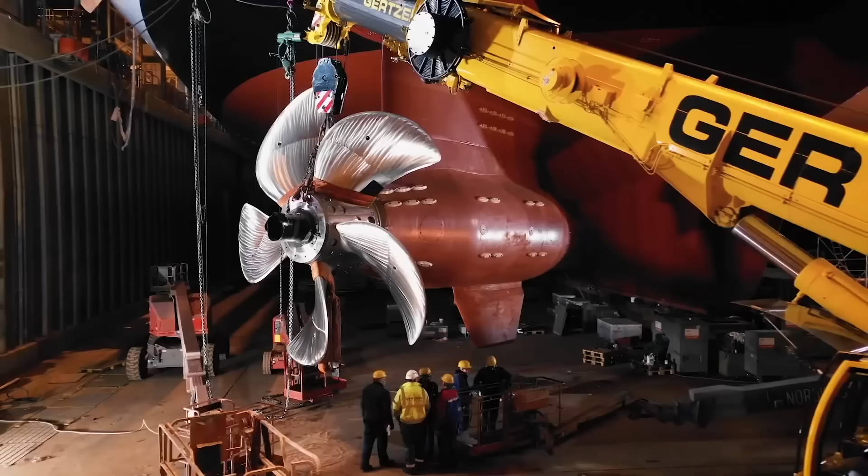By the way, the ship doesn't have 2 of these propellers, but 3. They're mounted on podded propulsion systems, so-called azipods. Those are made up of huge pods which are suspended from the bottom of the ship at the stern. They are capable of rotating 360 degrees, meaning azipods provide the giant vessel with easy and quick maneuverability.

I will show you in more detail how all this works in the second part of the episode, but for now, I will only say that these azipods were manufactured in Finland, and then sent by sea to the French town of Saint-Nazaire, the home of the shipyard where the vessel was built.

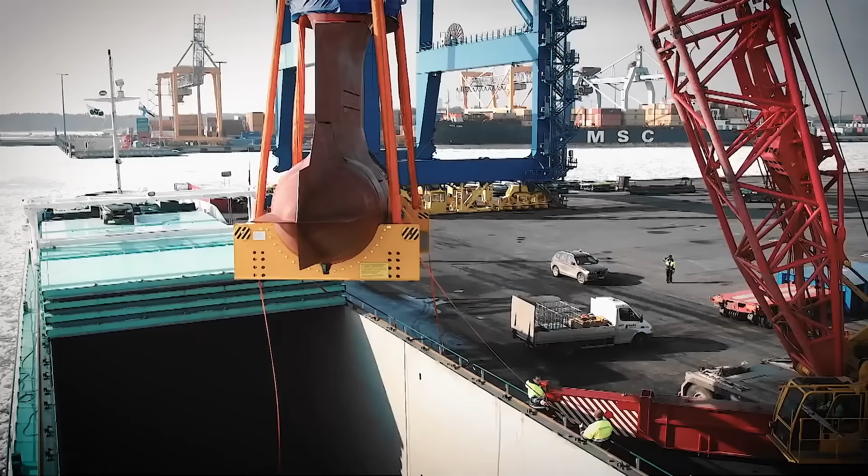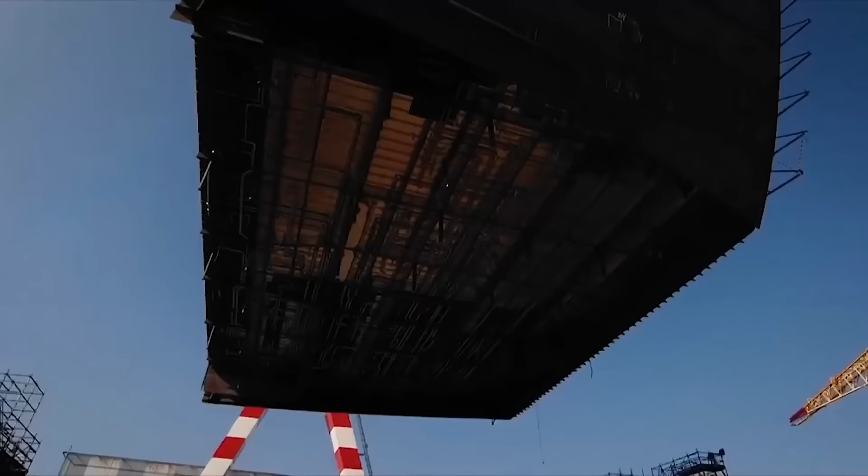In general, Symphony of the Seas is a huge construction set consisting of hundreds of thousands of parts which were manufactured in dozens of different countries located on different continents. So it began to unite people from distant corners of the world even before the first passengers of various nationalities ever stepped on board.

Boarding a ship is very much like boarding an airplane. Even these gangways, those who often fly know that they are almost identical to those in airports. Well, maybe these are a little wider. Planes have a maximum of 2 such gangways, while the largest airliners might have 3, but here there are 5. And another interesting peculiarity, boarding of an aircraft starts about an hour before departure and stops 20 minutes beforehand. But since 6,000 people have to go through here onto the ship, boarding begins 6 hours before departure.

This is why cruise ships almost always depart in the evening. All day long, passengers come on board, get used to their cabins, and then closer to sunset, the gangway is finally pulled back, the doors are all closed, and the ship rolls away from the quay wall.

Thanks to those azipods that we mentioned earlier, and additional bow thrusters, Symphony of the Seas completes this difficult maneuver by itself, without the help of any tugboats. Only a small Coast Guard patrol boat moves ahead of it, dispersing small pleasure boats and ferries out of the liner's path. This moment, already routine for the crew, is always quite exciting for the passengers, who at the moment of departure always pour out onto the upper decks. After all, the sea, and even more so these calm oceanic waters, aren't anything like railroad tracks, and these gigantic ships are actually seen off in a very different way from trains.

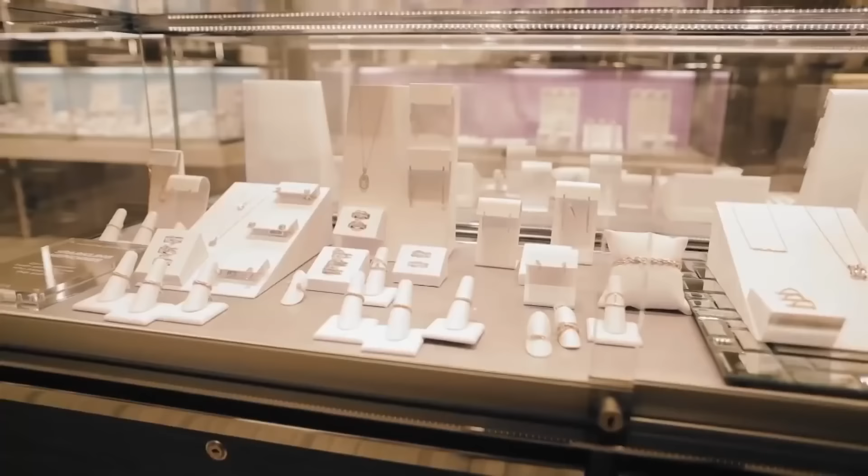The liner is 1,188 feet long, more than 3 soccer fields. Its width is 216 feet, and in this huge space there are 28 restaurants, 3 swimming pools, 10 jacuzzis, a theater equipped with the most complex Broadway machinery, an ice rink, a tropical park, a water park, a fitness center, a casino, and many shops and boutiques that constantly keep tourists in a state of shock and awe and continuous happiness. It is somewhat reminiscent of something out of a fairy tale, a place where you need only eat, sleep, and drink.

When you look at the map of the ship, these are posted everywhere here, you get the feeling that the ship is some kind of toy. Yes, there's 12 passenger decks. Yes, it says 2,750 cabins, but what do all these numbers mean? You only start to get a sense of it right here in the elevator atrium. Just take a look. 6 high-speed elevators transport thousands of people to a height of 229 feet around the clock.

And at the same time, all this is now moving at a speed of 30 miles per hour in the direction of Mexico. Incredible. Even more incredible is the fact that the ship is directly controlled by only 3 people while it's in motion. And among them, there is no boatswain, no skipper, no helmsman. Even the captain himself isn't on the bridge all that often.

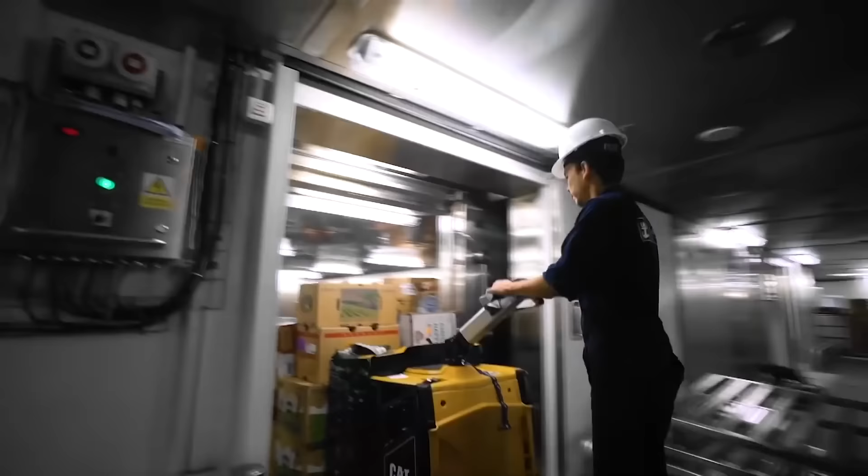While tourists are exploring local attractions, on the lower decks, preparations for the main task of the day are underway: cooking dinner for 6,000 passengers before they get back on board. For this, you first need to bring up several tons of products from the storage area to the galley.

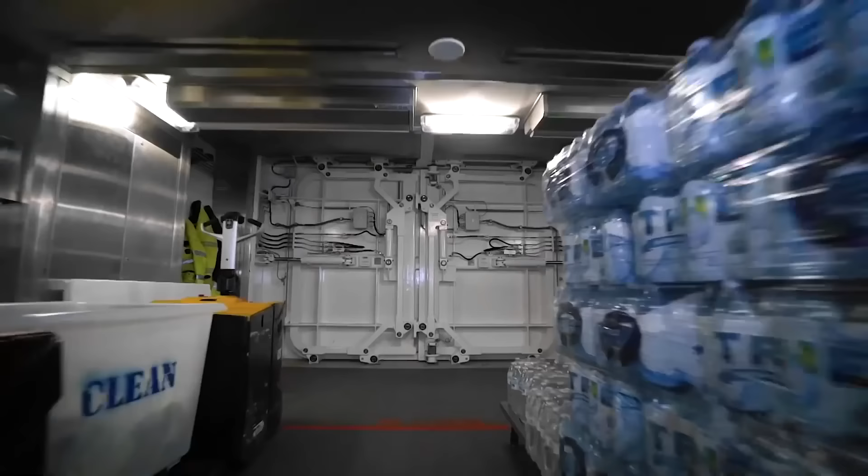Usually, the entire selection of products for the cruise is loaded onto the ship at the port of departure. The liner can only take water on at interim stops, and even then only bottled water. They are very afraid of the possibility of food poisoning here. Since thousands of people live compactly on the ship, a simple case of E. coli can turn into a real epidemic in the span of just a few hours. And even putting that aside, not all countries can provide products of the high quality that Symphony chefs require.

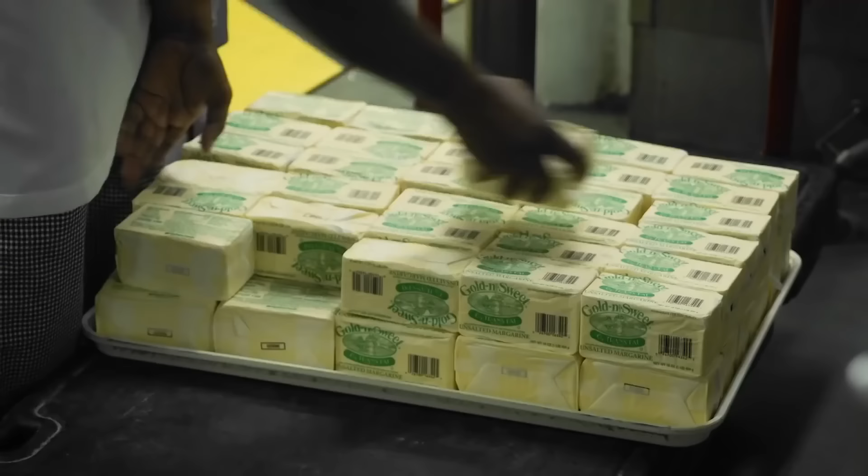All the refrigerators and storage boxes here open automatically with the press of a button, but there is one door whose button is behind a lock. Thankfully, I have the magic key. You've probably already guessed what's behind this door. Here it is, the holiest of holies of Symphony of the Seas storage area: several thousand bottles of elite red wine.

Milk, meat, seafood, vegetables, frozen products, fish, all of that and more is stored in the dozens of other refrigerators. Anything and everything that might be needed to prepare the 350 different dishes found on the ship's restaurant menus. Of all the foodstuffs stored on the ship, only 2 products are honored with having their own private refrigerators, simply because they are the most consumed items.

First, we've got bananas. Here are plenty of boxes with yellow ones, and there are also boxes with green ones. They will finish ripening during the cruise. And the second product is the most popular. What do you think it is? I'll show you now: eggs. 120,000 eggs are eaten on board every week.

Moreover, bananas and eggs are, as economists and logisticians say, goods of inelastic demand. Their consumption rate, and hence the required amount, is easy to predict. Things are more interesting when it comes to the rest of the products on board.

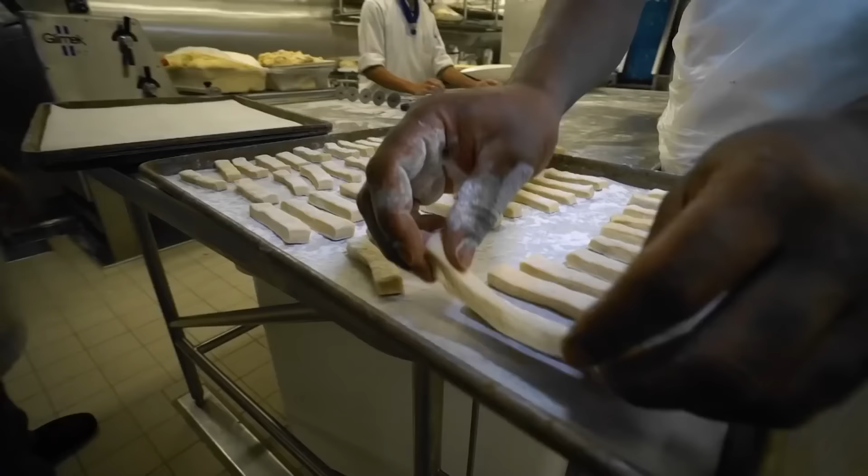On just 3 decks, more than 1,000 people are employed in this huge floating kitchen, 250 of whom are professional restaurant chefs. They fry, boil, flambe, sauté, and whip around the clock and in shifts.

Take breakfast rolls, for example. 12,000 of them are baked here every day.

In fact, the responsibility of the cooks here is enormous. The clients on the ship are very demanding, the products are expensive, and the cooking portions are gargantuan. Therefore, the slightest mistake in the proportions of ingredients can cost tens of thousands of dollars.

Well, for example, tomato soup, 160 liters of it. If it's a little bit overcooked or undersalted, that's it. Eat it yourself since no one else will.

Seating and serving several thousand people in the liner's restaurants at the same time is a separate logistical task, and they strive to make it so that customers don't have to wait more than 15 minutes for an order. Several hundred waiters of 50 nationalities cope with this task, each of whom must speak at least 3 languages.

And bartenders should know at least 5. Well, technically there was an exception made to that rule.

In general, everything on this ship suggests that this is a high-tech structure created according to the latest leaps of science. For example, in this bar, drinks are mixed, probably in the most progressive way on the planet. All you have to do is make your choice on the tablet screen.

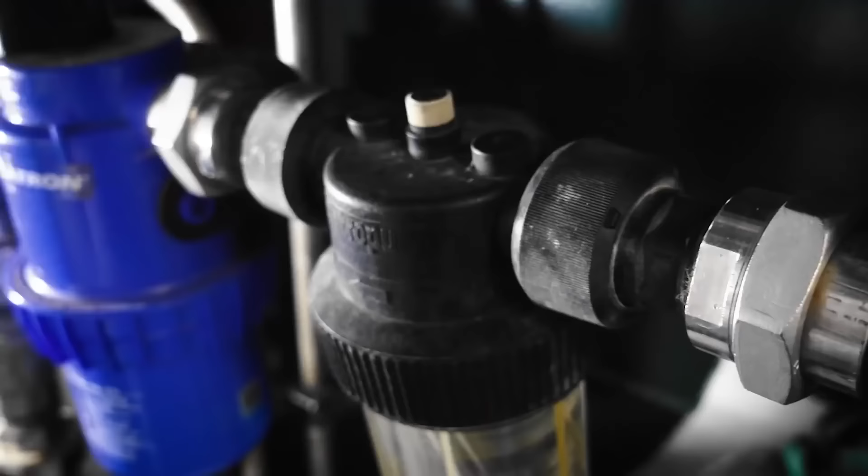Here's the main secret. Here in this blue barrel, fertilizer is kept. Water passes through it, carries away some of the fertilizer, and carries it to the plants.

So thanks, in fact, to this seemingly unremarkable little device, this whole huge blooming park exists.

Another secret of the permanently green park is its honeycomb structure. There was no solid ground here. All the plants, from the trees to the grass, are inserted into special cells in separate segments, small plastic boxes.

It turns out to be something like a huge puzzle. If one of the segments suddenly starts to get sick or dry out, it's simply changed out for a new one upon arrival at the home port.

This wall of vertical landscaping in the ship's central park follows the same principle. The gardener, who turns out to be a bit of an industrial climber as well, simply climbs in the bucket and changes out the parts of the wall that he doesn't like and discards the old segments.

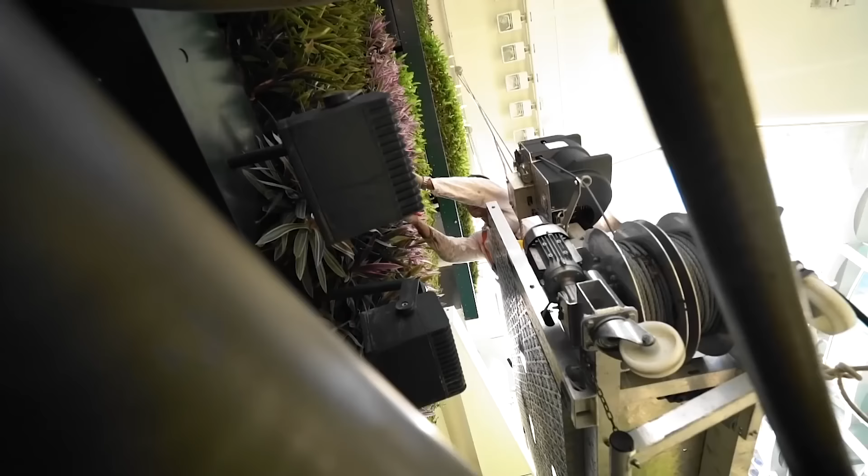There is no time for sentimentality. Nothing should prevent people from enjoying their time here and being filled with joy. Remember what I said at the beginning, that this episode was about a cruise ship without romance and without leaving anything out?

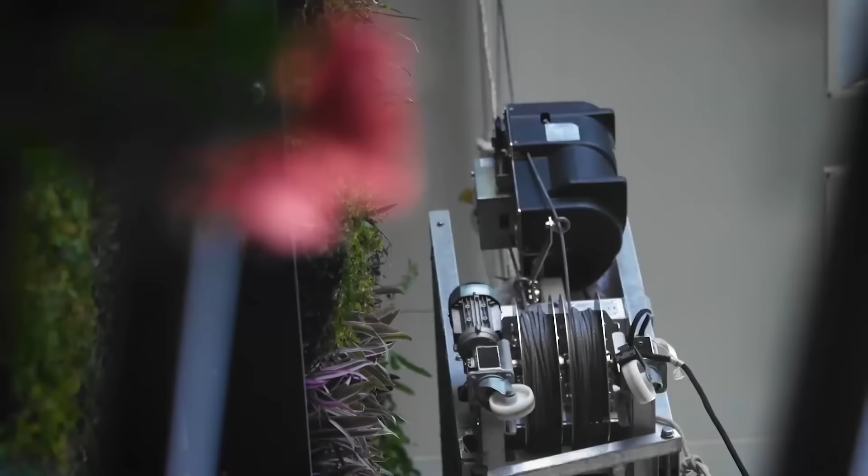In the next episode of Monster Machines: why doesn't the ice on the only floating ice rink in the Caribbean melt? Well, it tastes like the most simple, ordinary Russian snow.

How can 1,500 sheets be washed and ironed in one day? I want one of these for my house. Only thing is, I'm afraid it won't fit in my laundry room.

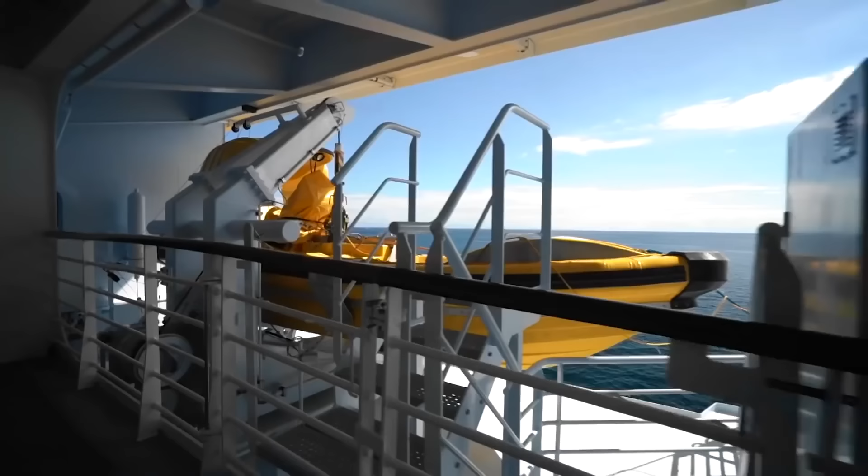Does Symphony of the Seas have enough lifeboats in the event of a disaster? How are the engines of this liner, which consume 3 tons of fuel per hour, arranged, and how do they work? 5th grade physics at work on the largest ship in the world.

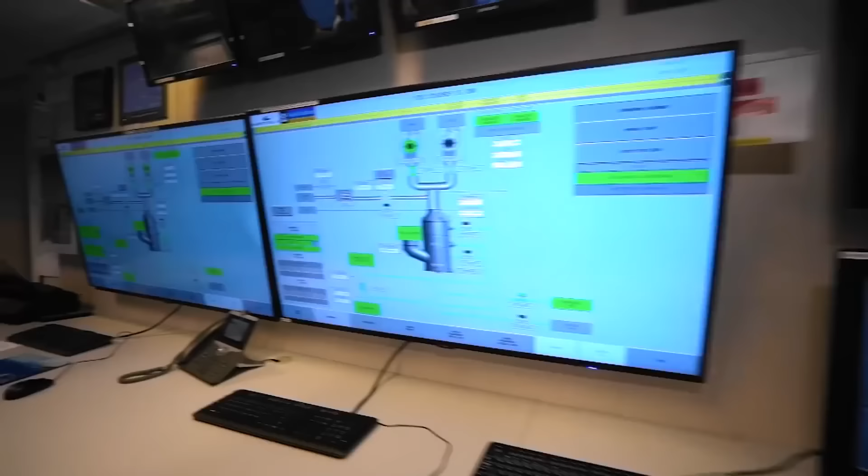What is a 19th century telephone doing on a super modern ship? Hello? Bridge? And how can 30,000 plates get washed in 2 hours? Mr. Clean would be impressed.

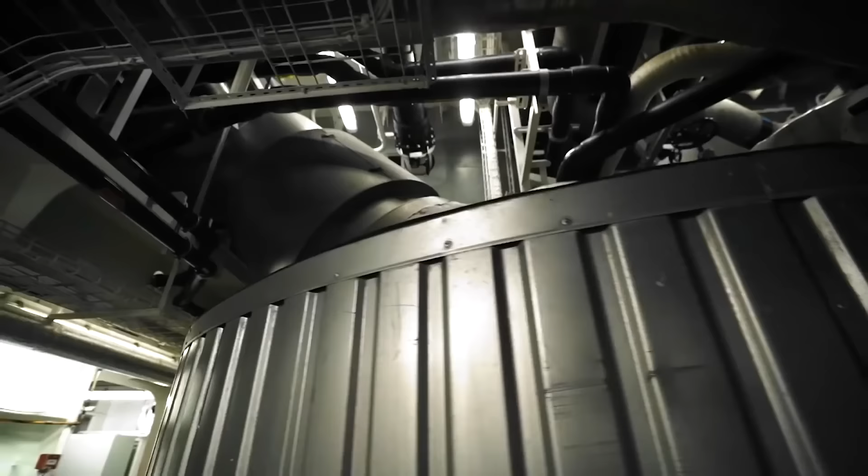See all this and much more from the anatomy of the world's largest cruise ship in the next episode.

In the first part of our look at the anatomy of the largest passenger liner in the world, we told you about and showed you why Miami is the home of this monster. Essentially, it turns out that the ship wasn't built to fit the size of the port, but the port was built to fit the size of the ship.

Who are the people who run this giant, and why is there no helmsman on the ship? This is the captain's chair. There's no steering wheel. What room on the ship is the most secure and guarded?

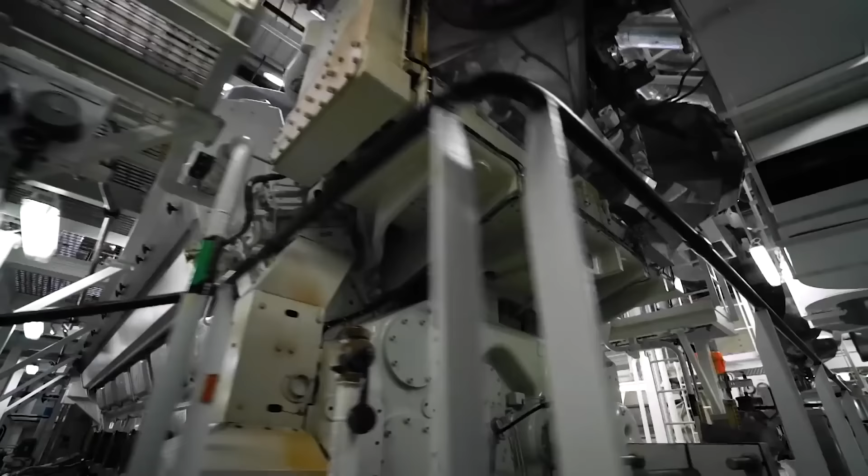Here it is, the holiest of holies of Symphony of the Seas storage areas. And how many cocktail recipes does the least talkative bartender on the largest ship in the world know? You're not much of a conversationalist.

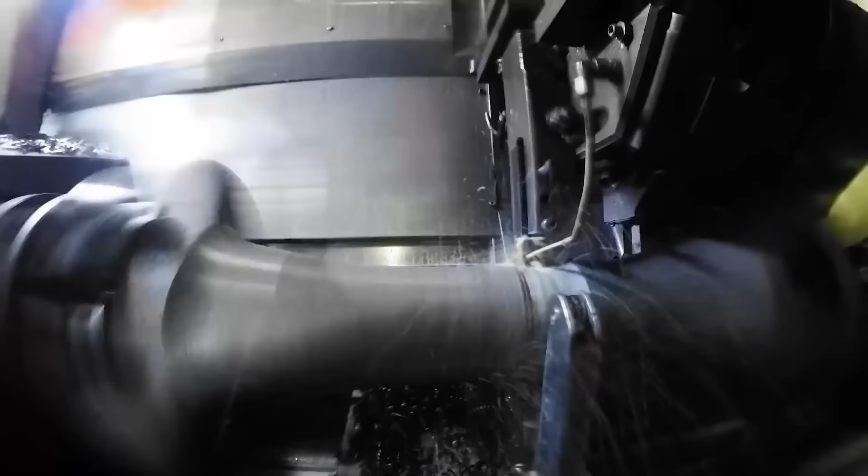All this was in the previous episode, and now we have even more about what's hidden inside this monster, a cruise ship without romance, but with science.

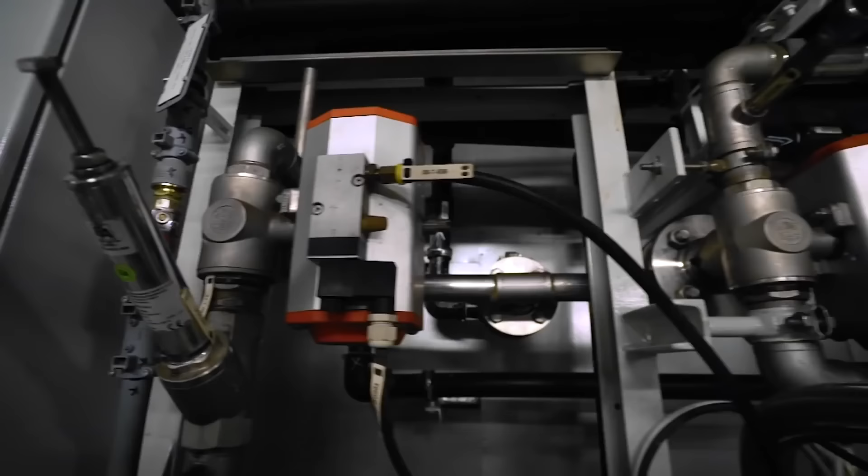And what could be less romantic on a ship than the machinery room? In the lower part of the ship, where tourists aren't allowed, day and night there's the roar of machines working in the semi-darkness, and these are what makes this entire giant city on water move.

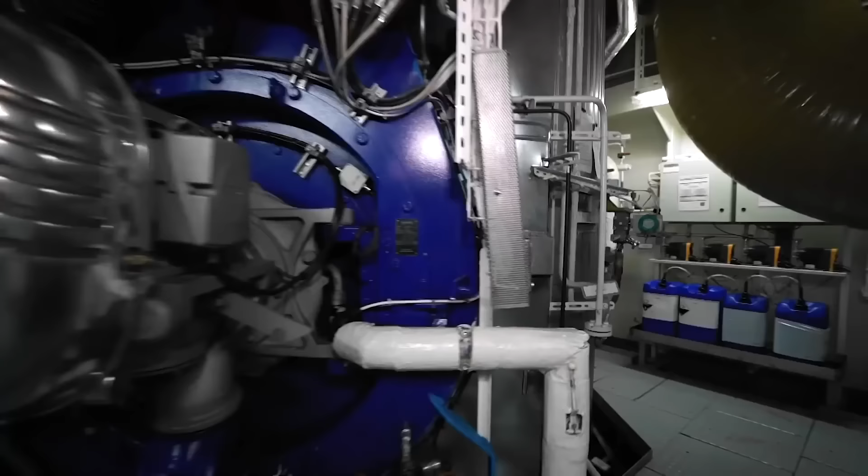Symphony of the Seas has 6 diesel engines with a total power capacity of more than 100,000 horsepower. For a point of reference, that's approximately the power capacity of 1,200 cars.

However, not even close to all of this energy is spent directly on moving the vessel. The ship consumes colossal amounts of electricity. For example, for lighting, there are about 140,000 light bulbs on the liner.

Also, electricity is spent on the operation of air conditioning systems and on the production of large quantities of water vapor. Despite the fact that steamers and steam engines are a thing of the past, modern liners still use steam. A lot of steam.

No, it of course no longer rotates turbines as it did, for example, on the Titanic, but steam is needed for more domestic purposes. It's a simple method for heating the water in showers and bathrooms, and it also heats different spaces when necessary.

However, those aren't its main functions. Steam is necessary for the heating systems for the huge fuel and oil tanks, and it's also used in fuel-oil separators. It's consumed by the turbo drives of some pumps, and for several other important machines on ships, even in the 21st century.

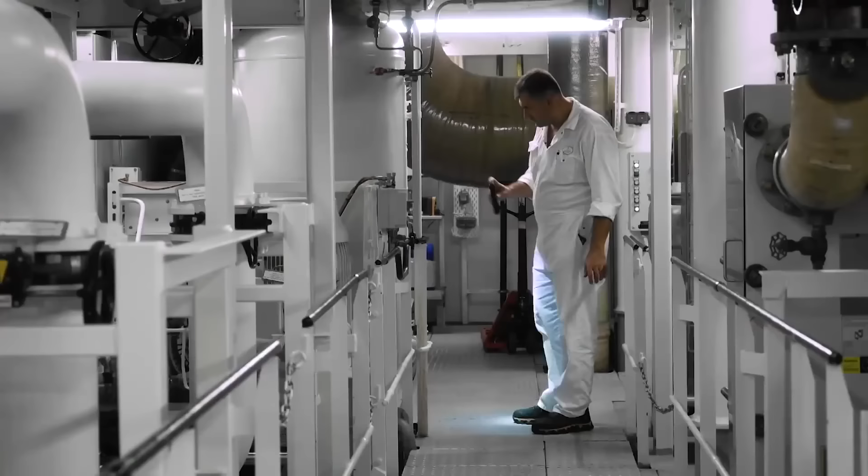Moreover, it must be perfectly clean so that impurities don't build up on the walls of the steam lines. Therefore, it is created from distilled water.

But where do they get such large amounts of distilled water? It's produced right here on the ship using giant distillers. Here they are. There are 3 of them.

The principle of operation is very simple. It's basically a big tea kettle. This is where water from outside comes in. Here it's boiled, steam accumulates in the upper part of this chamber, and the sea salt settles down at the bottom.

So after a while, overheated steam, and there's a lot of it, enters this chamber. Here it condenses, and as a result, the finished distilled water is drained through the pipe.

And the leftover salt? No, it's not used in the kitchen. They just throw it back into the sea. Several tons every day.

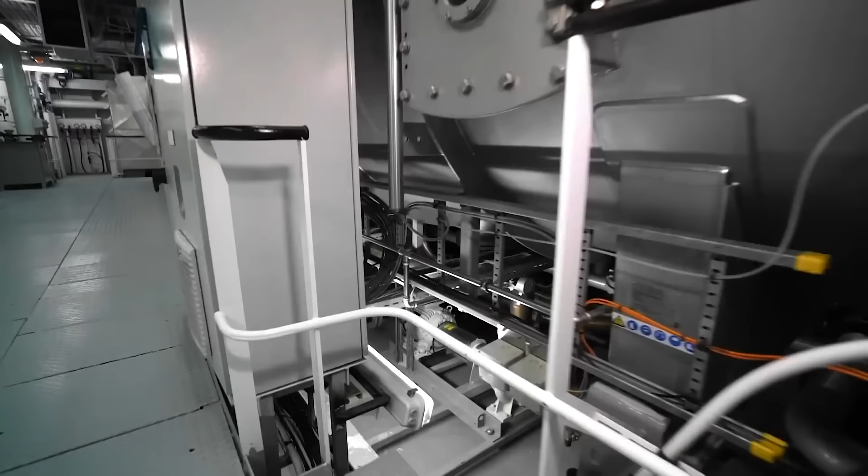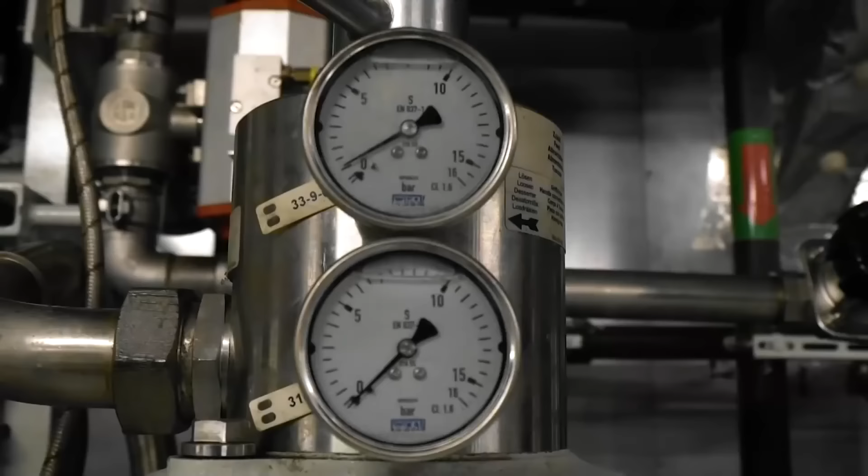This does not harm the environment in the slightest, since in essence they're only turning the ocean's own salt back to itself, while keeping the moisture on board. Then the distilled water goes on to be filtered, and then it enters the boiler.

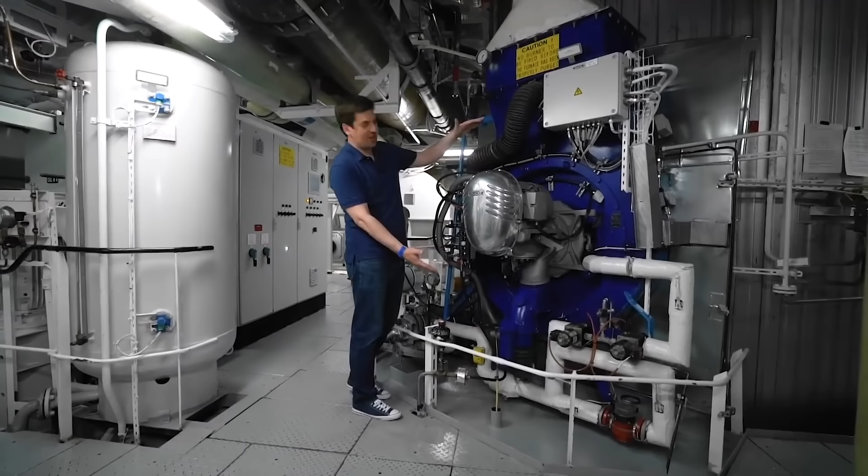The principle of its operation is about the same as that of the boilers many of us have in our bathrooms at home. There's a small burner here at the bottom, and a tank of water on top—a very large tank, 5 tons—and it starts boiling in just a matter of minutes.

In the end, the resulting steam is used for its intended purposes. Part of it, when it condenses again, is sent back to the boiler. This is the so-called reverse cycle. But most of it is irretrievably lost, and therefore the reserves of distilled water have to be replenished all the time.

It's also needed to freeze an actual skating rink on the ship. Here you can skate during the day and watch an amazing ice show in the evening, featuring a number of Russian figure skaters.

The ice here is of a very high, one might say Olympic quality. The ice on the rink measures about 3.5 inches thick. Surely many of you have seen an ice resurfacing machine on TV, or maybe even in person. They've got the exact same kind here, though maybe a little smaller than typical ones.

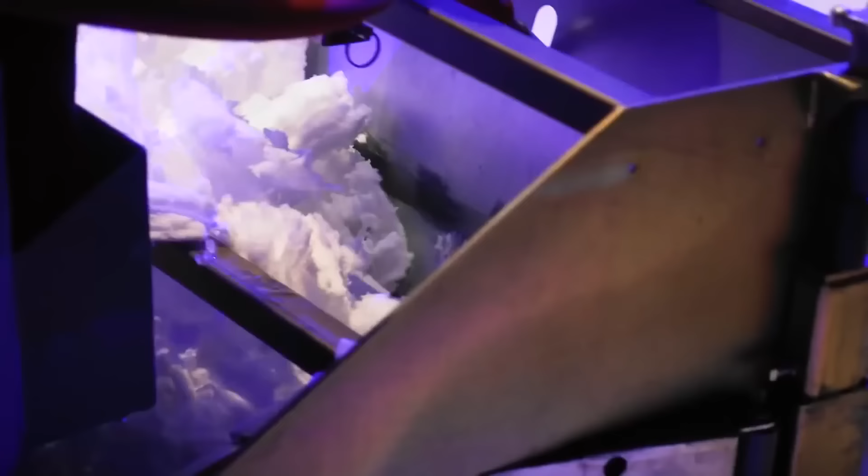Since this ice is frozen from desalinated seawater, it doesn't freeze quite as well, and according to the skaters, it's softer than the ice they are used to performing on land. It's hard for me to imagine how ice could be soft, but what is absolutely certain is it's incredibly clean, distilled. I even gave it a taste, but it was really nothing miraculous, just your typical snow.

The total weight of the ice in the arena is several tons, and a refrigeration unit is needed to freeze it. Again, it's about the same as the one used on professional skating rinks and arenas, though this one might be a little smaller. It's located, as you'd expect, in the area under the stands. The principle of its operation is very simple.

Through special pipes, wrapped in thermal insulation, water and refrigerant with a temperature of 14 degrees Fahrenheit are pumped to the arena. This freezes the ice layer by layer. It takes about 5 days to prepare the entire ice rink.

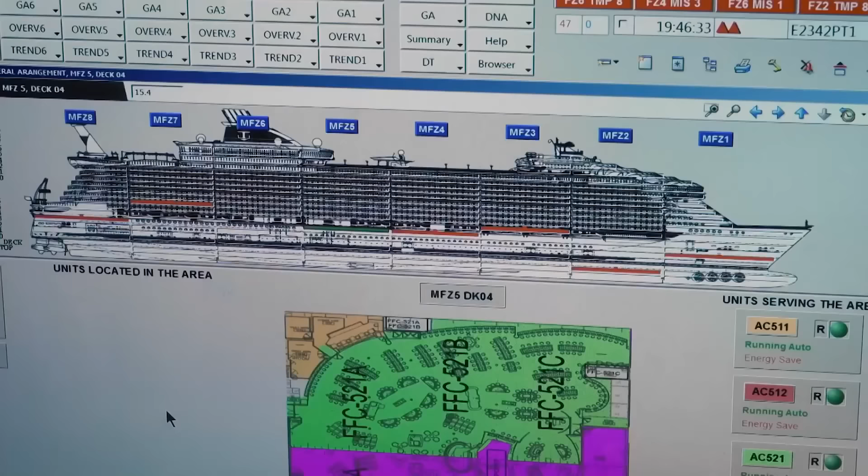The owners and designers of Symphony of the Seas claim that this ship is not only the largest in the world, but also the safest. There are so many different safeguards in place in its control system that it's argued it's almost impossible to lead the liner into disaster, even if you were to deliberately try to do so.

Still, in the event of an extreme case, there are means of evacuating the ship on board. They have to accommodate the evacuation of all passengers and crew if something were to happen. These lifeboats, to match the ship, are the largest in the world, each with a capacity of 370 people.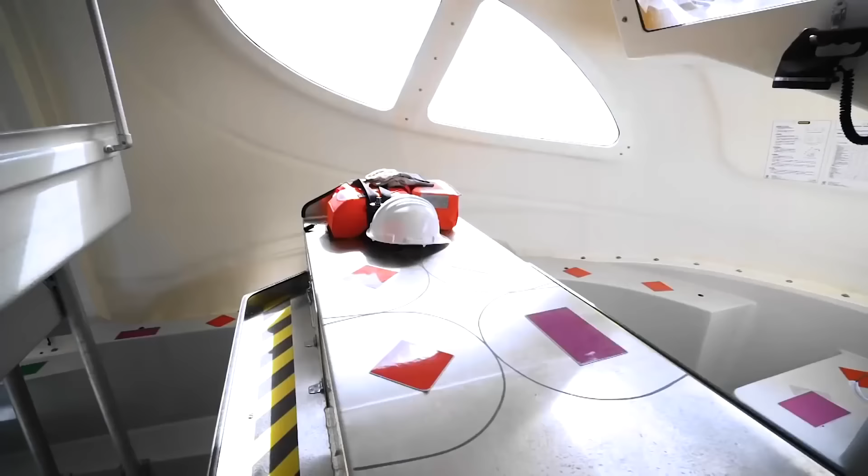There are 18 of them on the ship, and they are kept fully prepared at all times. Their fuel tanks are filled, and they have a cruising range of about 155 miles. There's a special supply of dry rations and water on board in sealed boxes, since in the event of a disaster there would be no time to bring it all from the ship.

In general, everything is thought out to the smallest detail. This unsinkable and waterproof plastic jar, for example, contains signal flares.

In addition to the huge boats, there are also many rafts that inflate themselves in the water, and several high-speed rescue boats, used to coordinate action and quickly help people who find themselves in the water.

The crew must participate in evacuation exercises at least once a month. This vessel has never seen a real red alert, but thanks to constant training, 2,000 crew members are ready for any turn of events, 24 hours a day, 7 days a week.

The ship also has its own waste recycling plant. Here it is. This, for example, is a machine for pressing cardboard packaging. Here, cans are collected, then they are all crushed into these large bricks.

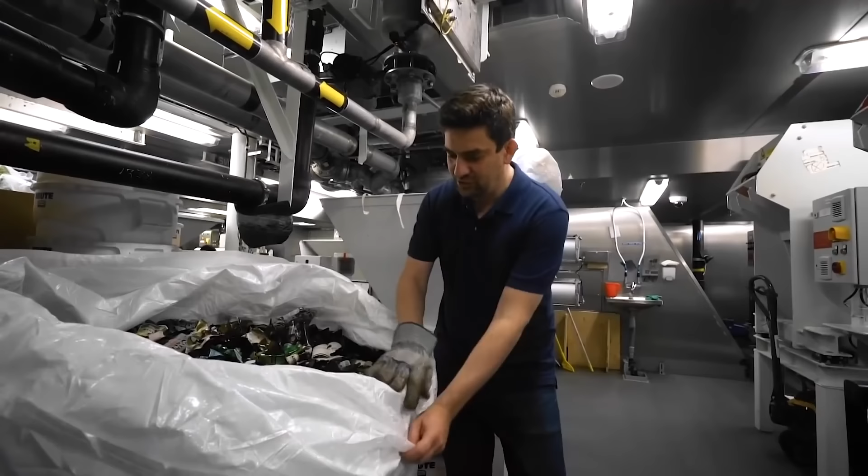Cellophane is processed here. At first glance, it's a little paradoxical how they deal with glass bottles. I'll show you now—they are simply broken into little pieces so they take up less space, and sorted as follows: here we have a big bag with dark glass, here we have broken transparent bottles, and here we have green glass.

And here's what's surprising: as is everywhere else on the ship, in this waste recycling shop, everything is kept perfectly organized. There isn't even an unpleasant smell here.

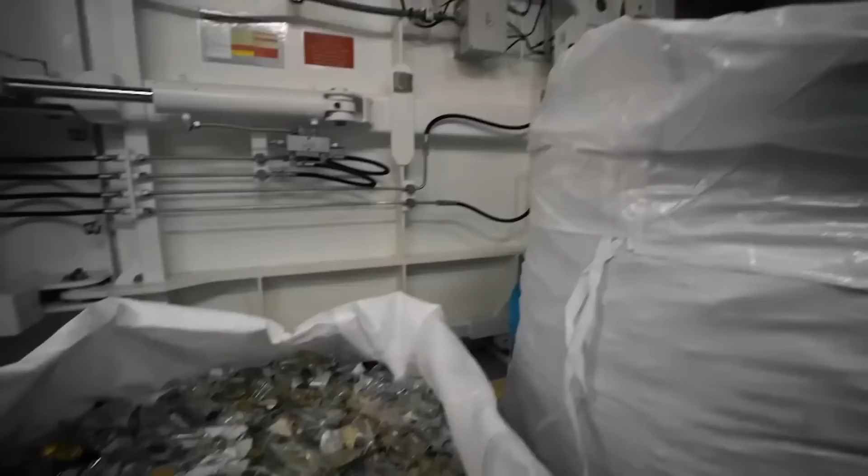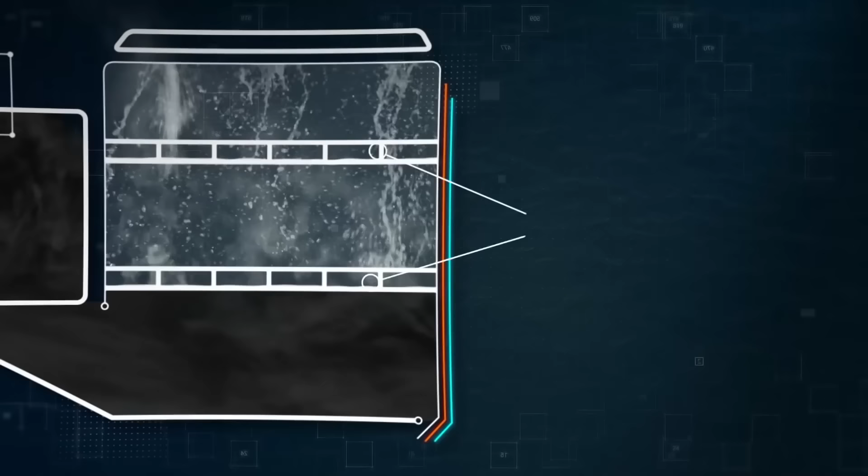The creators of this ship seem to have a thing about cleanliness and environmental friendliness, in a good way. For example, the liner's engines burn several tons of diesel fuel every hour, but not black, not even blue, but exclusively white smoke comes out from the Symphony's exhaust pipes, all thanks to scrubber cleaning. Simplified, the exhaust gases are washed with seawater. This dirty water is maintained and stored in special tanks until the ship arrives at a port, and only carbon dioxide with a minimum amount of soot and impurities is released into the atmosphere.

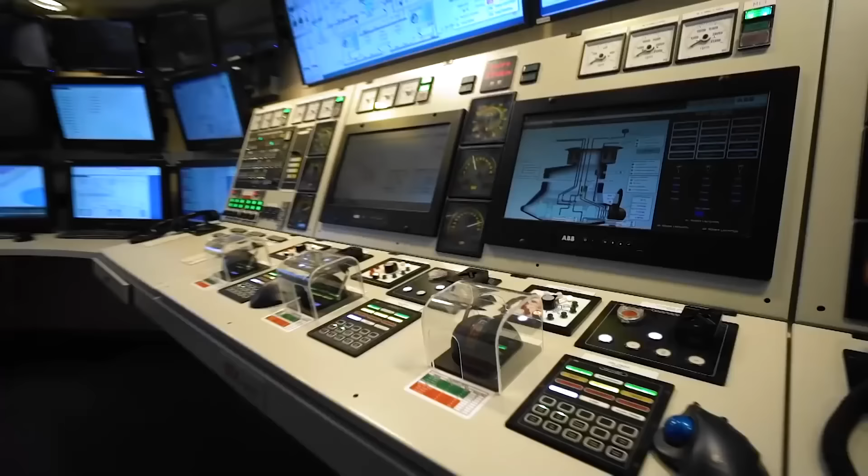Scrubbers and engines are managed from this control room. It's located in the very center of the ship, almost at the waterline itself. Therefore, there are no huge windows here like on the captain's bridge, but there are 51 monitors which display thousands of different parameters. The largest touchscreen control panel even had to be hidden in the ceiling, since it's already pretty cramped without it.

There's a special emergency phone in this control room, for singular emergencies. Its peculiarity is that it will work in any case, even if, God forbid, all systems here completely fail and all power is lost. By what means? I'll show you now. Good old inductive coil. This technology is probably around 120 years old, and it's very strange to see it on this ultra-modern ship. But technology such as this is sometimes the most reliable. Hello? Bridge?

Apart from that, the equipment in this control room is of a quality comparable to NASA's Flight Control Center, and the whole vessel is practically a spaceship. Sure, they're not jet, but diesel-fueled V engines, but each weighs about 200 tons. Two of them are 16-cylinder, four more are a bit smaller with only 12 cylinders.

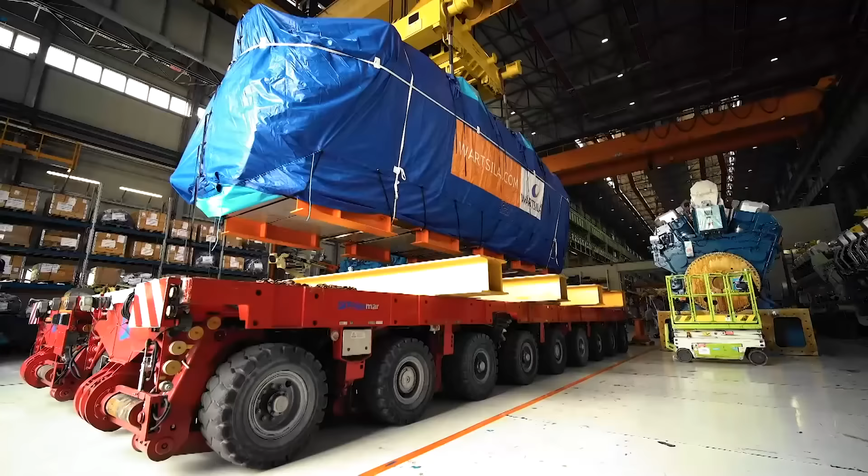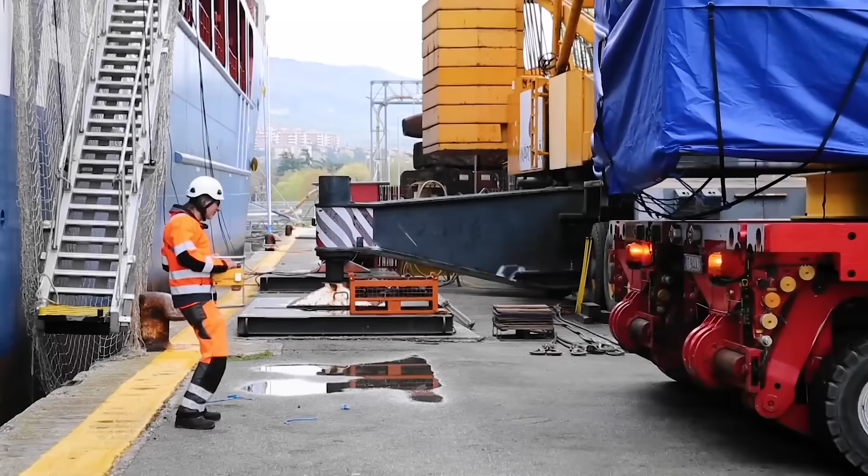These giants were made in Italy, and then sent by a special convoy, first along blocked-off roads, then delivered by sea to a shipyard in the French town of Saint-Nazaire. Building each of the six fiery hearts of this monster was such a difficult technological task that we decided to show it to you in more detail. That's why we're taking the reverse path to the engine, from the Caribbean Sea into Miami, through France to the Italian industrial port of Trieste.

The company that makes the world's largest marine engines in Italy is actually from Finland. It's called Wärtsilä. It got its name in honor of a small Finnish village where this business once originated. Curiously, today the urban-type settlement and the Wärtsilä station of the October Railway are part of the Sortavala region of the Republic of Karelia, a typical Russian single-industry town with a modest budget. At the same time, Wärtsilä has an annual revenue of several billion dollars.

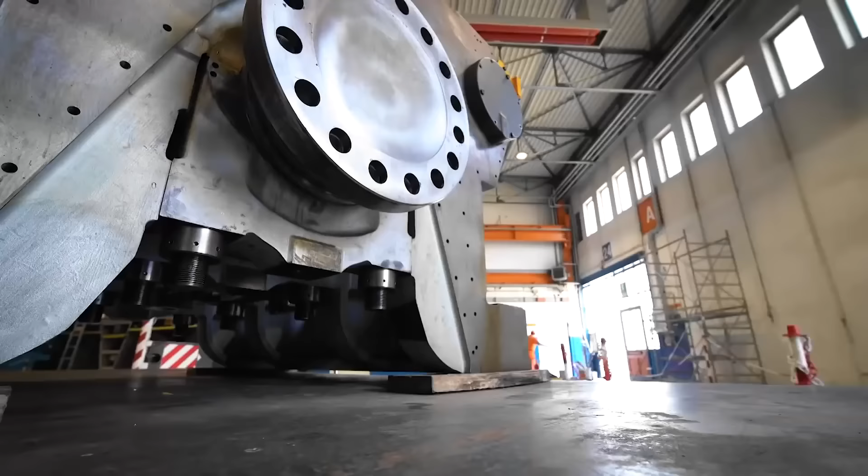But back to the engines. Each of them consists of several thousand parts. Some of them are made right here in Trieste, some come from subcontractors. Cast and forged blanks, for example, are sent from a metallurgical plant in the Czech Republic. The so-called connecting rods come here to the plant crudely forged, very coarse to the touch.

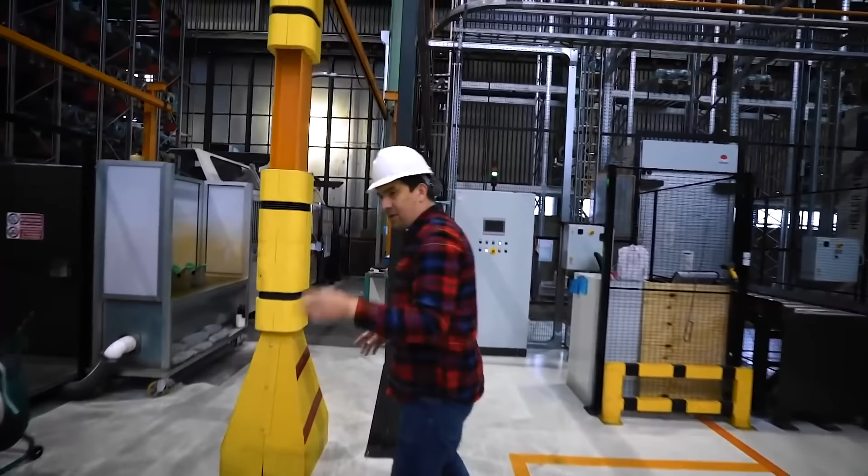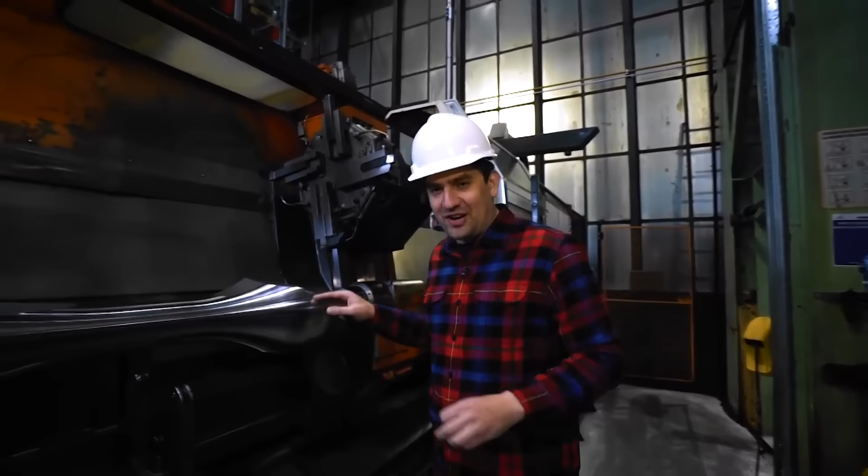Here, they are then installed in these machines. They each weigh 330 pounds, by the way. Many of us, when we were kids, in shop class did something similar, carving out various objects. It's about the same here, only the size is much larger, and the accuracy is very high. As a result, the connecting rod is worked to just a mirror shine.

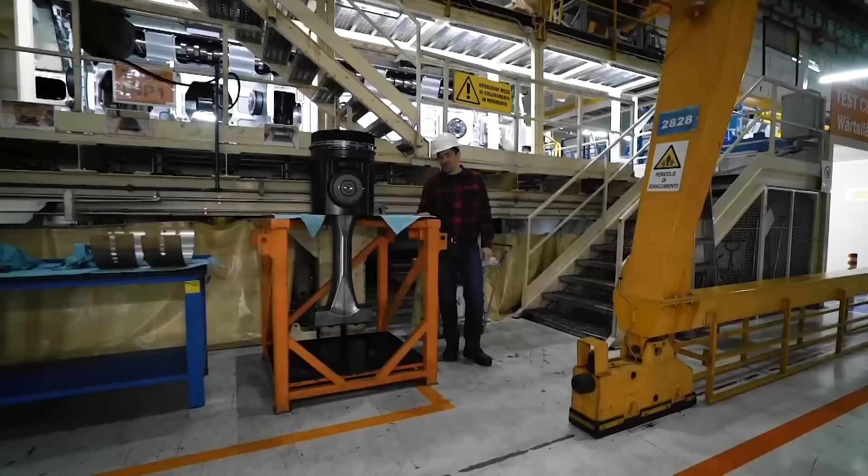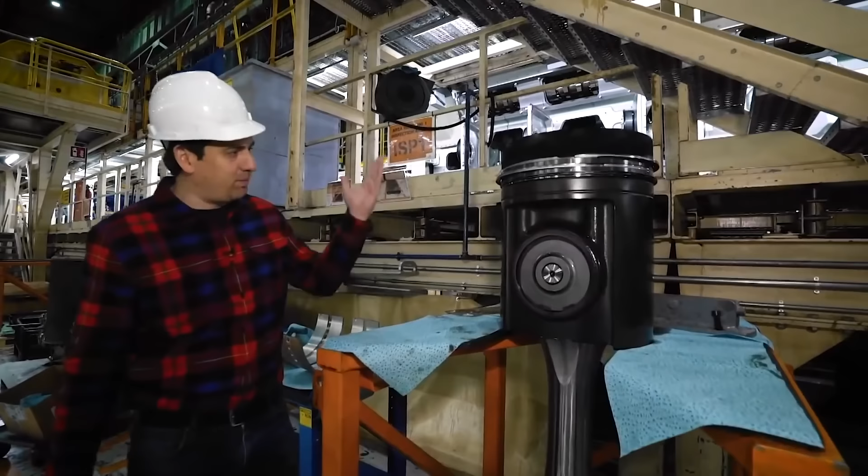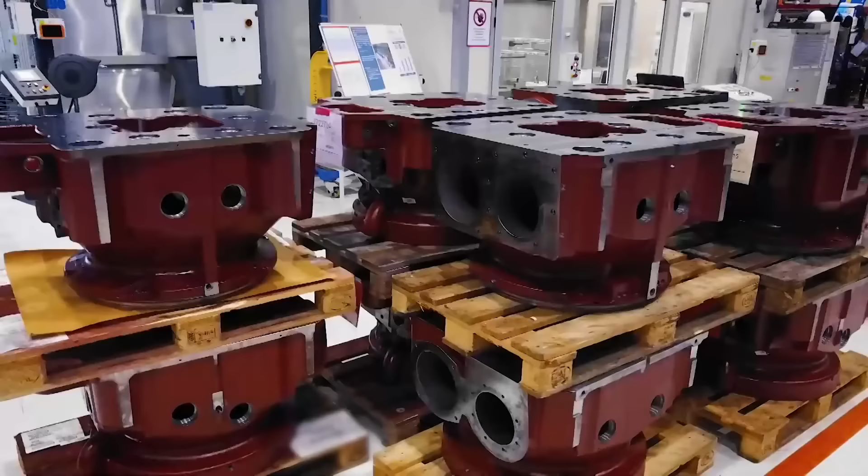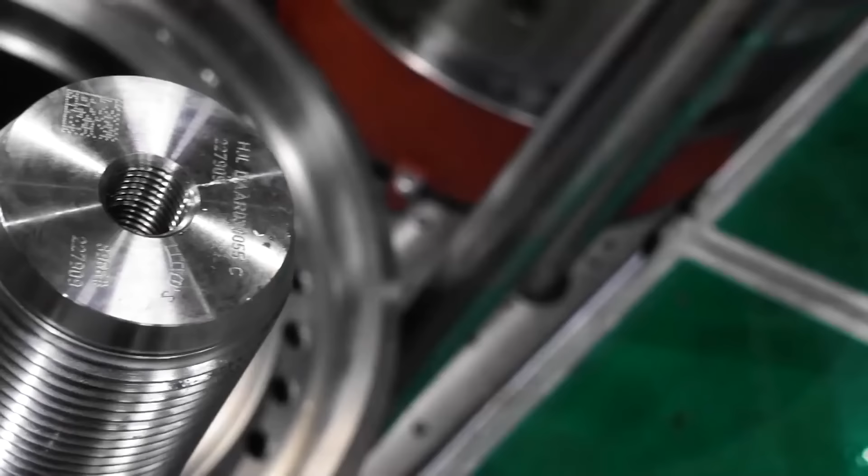And this, I repeat, is only one cylinder, and in two of the engines on Symphony of the Seas, there are 16 cylinders just like this one. The main difficulty here is that huge parts, sometimes weighing several tons, must fit together perfectly. There is so much force and heavy loads involved that the slightest deviation or inaccuracy can send the engine off the rails, and in the open sea that can threaten a catastrophe. Therefore, manufacturing margin errors are as severe as with Swiss watches.

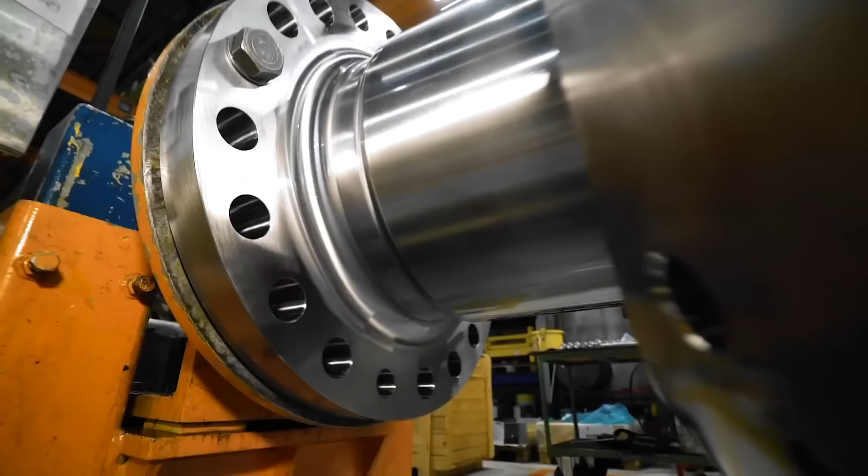Using the crankshaft as an example, you can easily understand the principle of operation of a piston engine. In this position, the piston would be in the upper position, and this crank pin is also up. At the same moment, the other piston is in the lower position, and the crank pin is at the bottom. Thus, the pistons move up and down, and the shaft rotates. Everything is very simple, but the most amazing thing is that this particular shaft weighs 25 tons, its length is 26 feet, and it's made of one single solid piece of metal. Just unbelievable.

By the way, there are only a few metal lathes in the world that can carve a 26-foot item like this from a multi-ton bar of high-strength alloy steel. The turner's worst nightmare here is to screw up even one detail. The crankshaft is worked on for several weeks, and it costs more than $1 million.

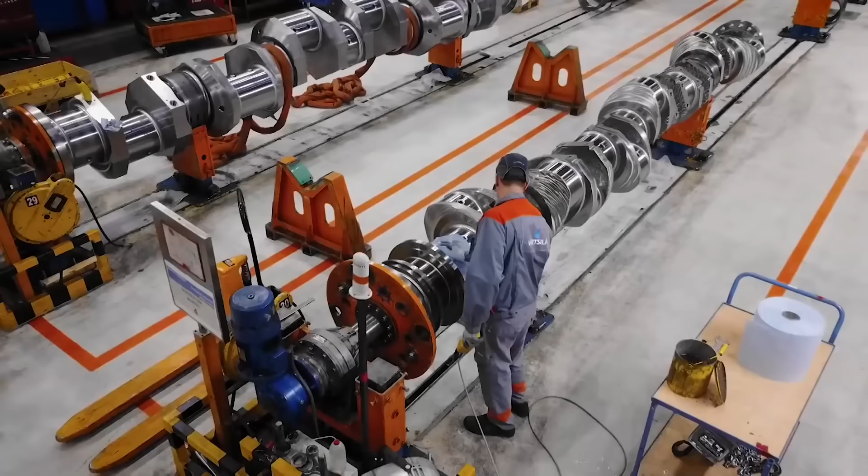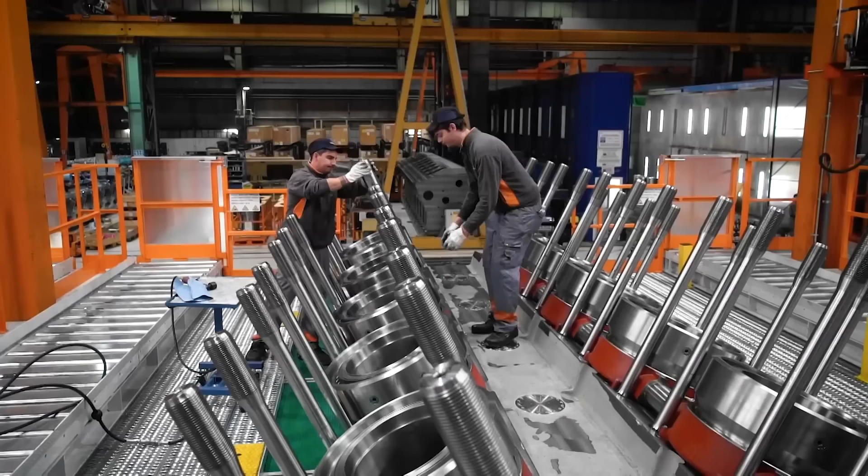Ultimately, after numerous checks and tests, the crankshaft and thousands of other parts are sent to the assembly area. In a few more weeks, the engine is finally ready, and now tests await it.

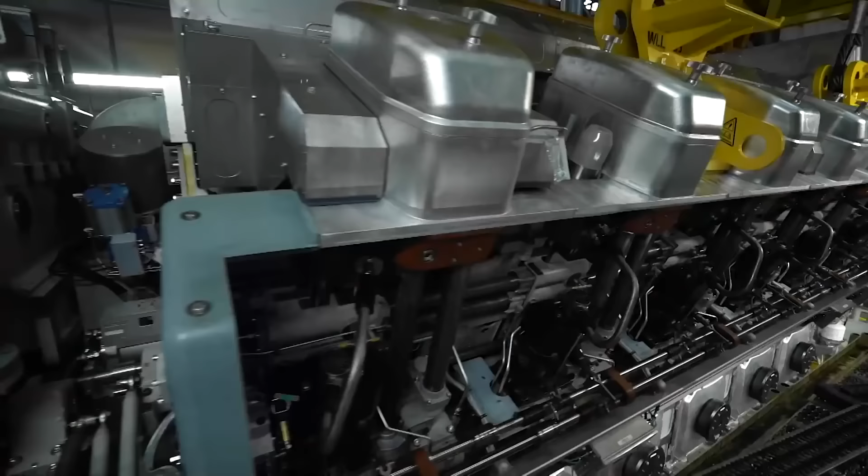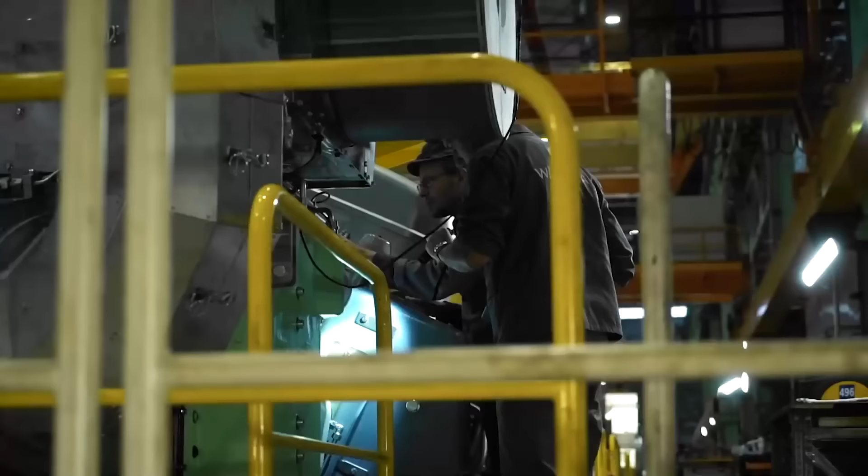Everything here, again, is like in a car. We open the hood and look inside. Perhaps the most important difference between this engine and a car engine is that there are 12 of these hoods, or rather viewing windows.

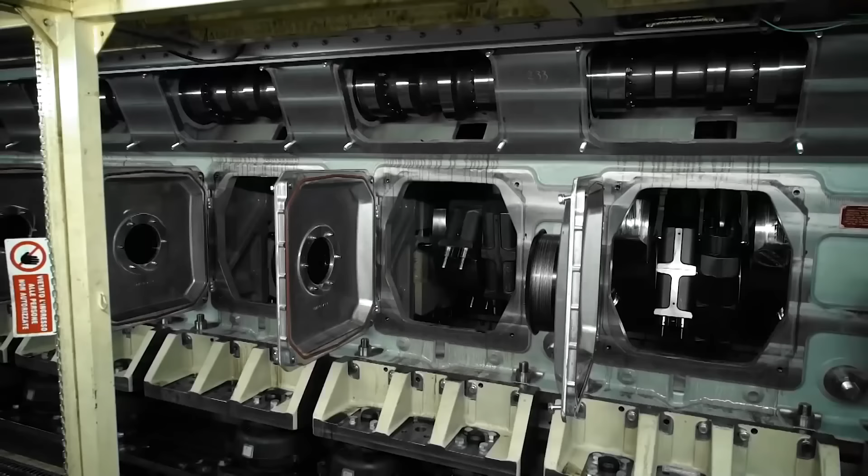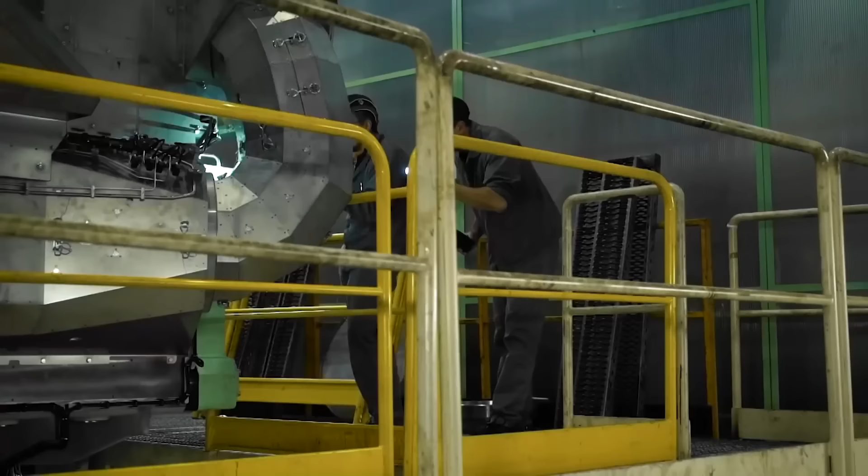Behind each of these windows is one of the cylinders and pistons connected by a connecting rod to the crankshaft. If you wait for the oil to drip down from the parts, you can simply see with your eyes if any jams or other metal defects have formed during the tests. When at this stage the inspectors give the go-ahead, the only thing left is to pack up the engine and send it to the customer.

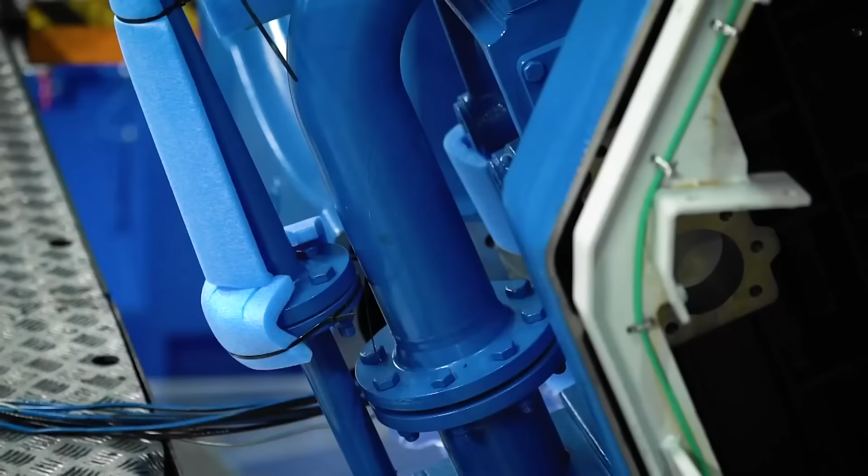But that's easier said than done. Anyone who has ever transported, say, a dresser knows that the most necessary things to get that done are duct tape, some styrofoam - oh, here we have some.

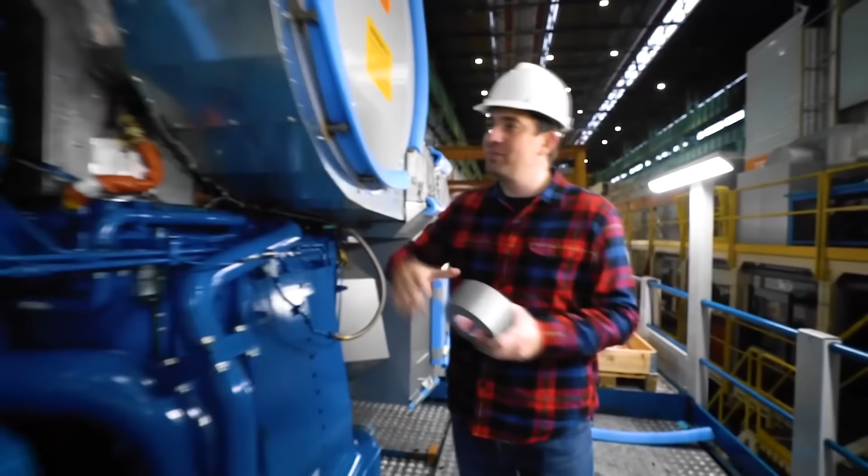Well, and a lot of bubble wrap. When moving a finished engine, everything is about the same. All protruding parts are carefully wrapped with these foam corners, sealed with tape, cling wrap, and so on and so forth. Well, in general, everything is the same as when moving furniture. There is a slight difference, though - the weight of this dresser is 180 tons.

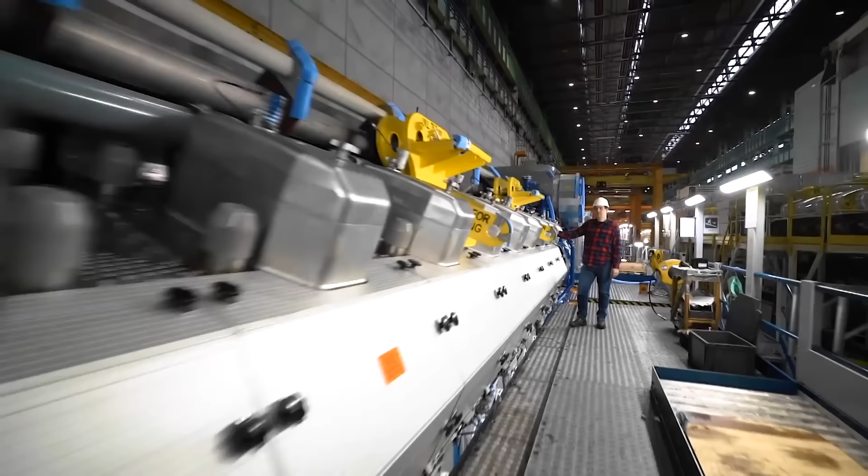It takes a week just to get it ready for transportation. By the way, at the same time, road services and a special platform, the only one in Europe that can support such a weight and size, are being prepared for the giant's move to the port.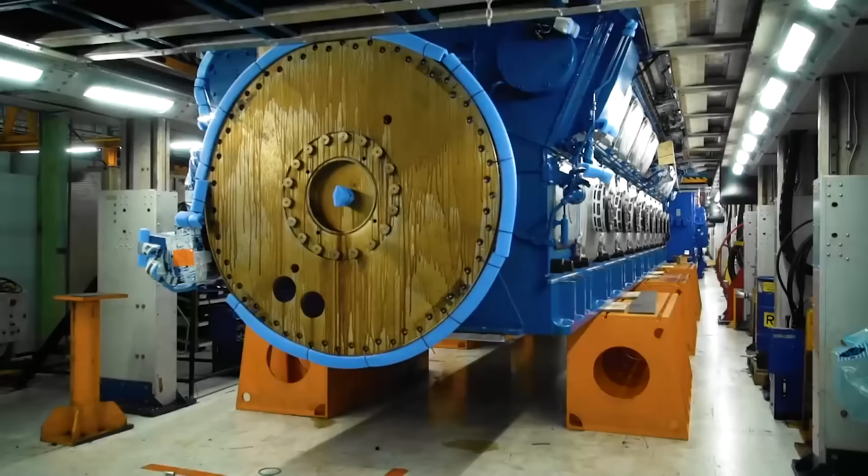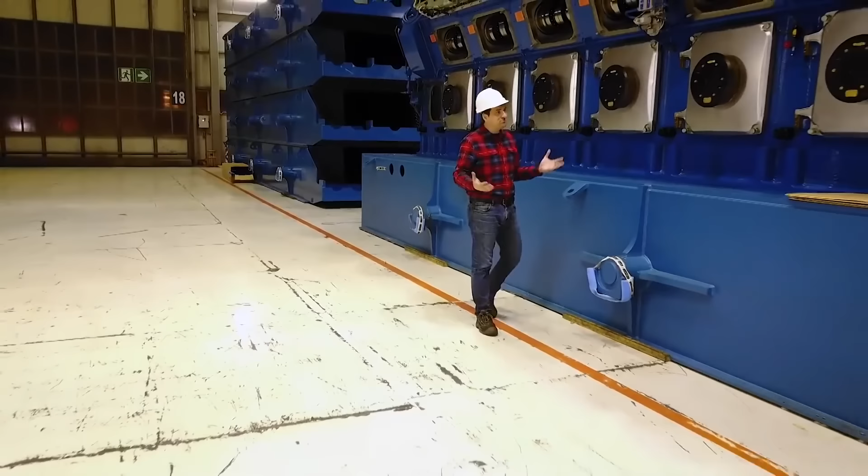Only here, at the very end, in the finished goods warehouse, can you begin to understand the true scale of this giant engine. Its height is about that of a 3-story building. It weighs several hundred tons and generates the amount of electricity that would be needed for a small Moscow neighborhood. The actual biggest mechanical heart in the world, of the world's biggest cruise ship.

And let me remind you, Symphony of the Seas has 6 of them, and although at the same time, even at full speed, usually no more than 3 of them are working, the fuel consumption is still massive, and that's why the company that owns the ship uses a little trick.

However, there is one caveat. For some reason, the fuel from these countries often contains water. By accident, of course, I'm sure, but this is unacceptable for the engine. Therefore, all fuel is cleaned directly on the ship before being fed into the combustion chamber. But how can several tons of fuel be cleaned per hour, and when moving at full speed too?

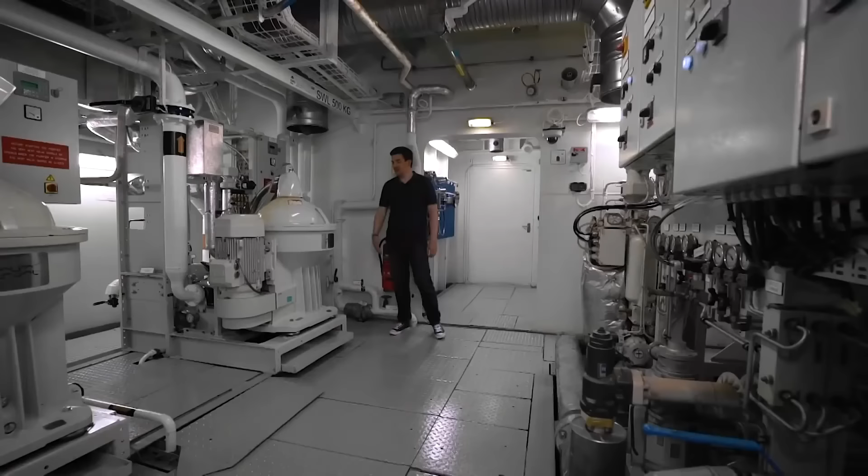And here, centrifugal force comes to our aid. Fuel enters these separators, which are in essence huge mixers, and it's spun at a breakneck speed. What happens in there? Water, which is heavier, is forced out to the walls, and the oil product, as the lighter portion, accumulates in the center and then enters the engine. 5th grade physics at work on the largest ship in the world.

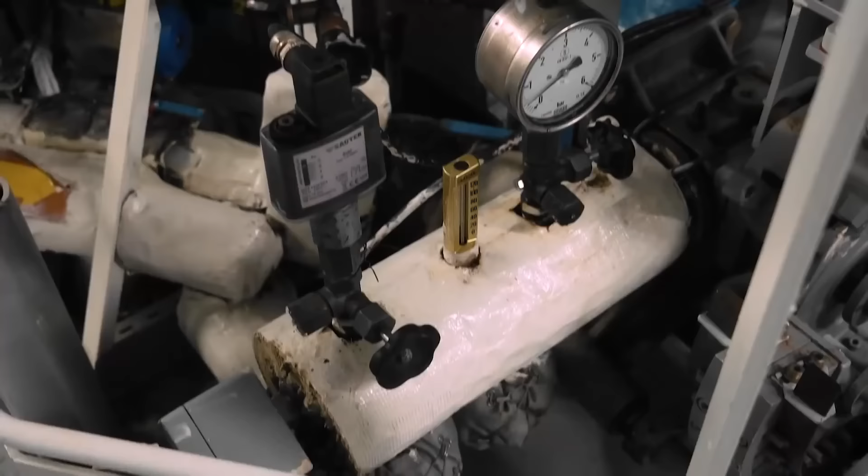At the same time, the fuel in the separators is also heated. That makes it more runny, and it therefore burns better.

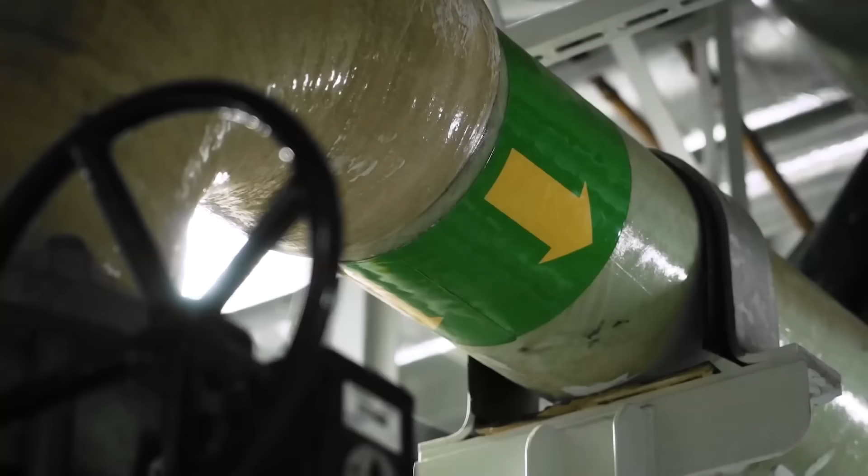By the way, the liner has an electric drive. Its powerful internal combustion engines do not directly rotate the ship's propellers. They spin generators that generate electricity, and then, along high voltage lines hidden in the bowels of the liner, the current travels to the electric motors, which spin the propellers. This diesel-electric circuit makes the vessel more maneuverable. After all, an electric motor, unlike a piston one, can stop and change direction of rotation almost instantaneously, and it doesn't need a gearbox. The motors, together with the propellers, can also rotate 360 degrees around their axis. Therefore, it becomes very easy to operate the liner.

However, even the most high-tech devices and numerous automatic safety systems are not able to 100% protect the ship from basic human error. 3 weeks after we filmed this episode, in the same Mexican port where Symphony of the Seas stopped for an afternoon, 2 cruise ships managed to collide.

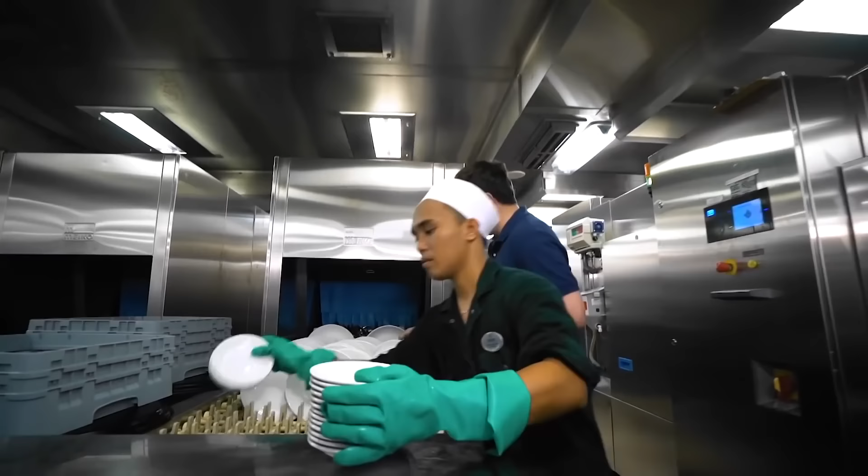Dirty dishes are being loaded from that side and clean ones are already coming out here. The whole process takes less than 1 minute, extremely fast. Mr. Clean would be impressed.

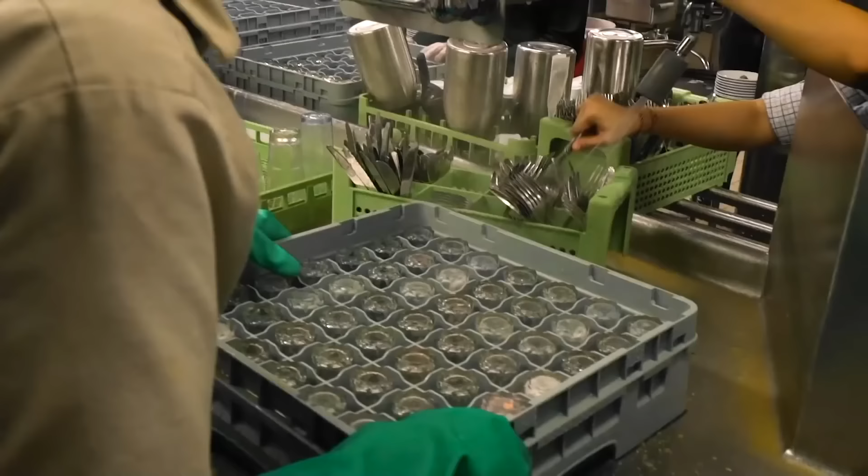There was no other choice, because after every dinner, about 50,000 dishes have to be washed, and that's not counting the kitchen utensils. Though it may seem like less than a critical machine, the dishwasher on the ship is actually such an important unit that it has a twin backup in case the main one breaks.

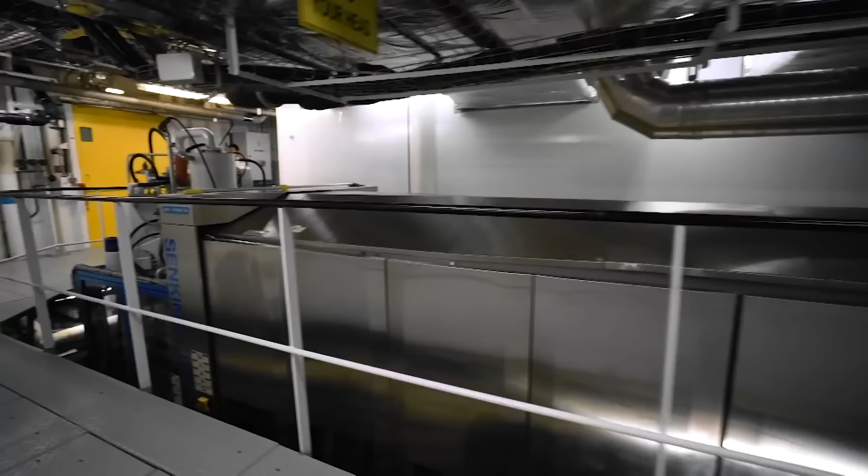Another one of the liner's important machines is the washing machine. It was built to special order and installed in the bowels of the ship at the time of its construction at the shipyard. A whole 2 technical decks of Symphony of the Seas have been given over to laundry. Here, about 10,000 towels are washed every day.

They also tried to automate this process as much as possible. Housekeepers collect dirty towels from the rooms, sort them by color, and send them to the laundry decks. Here, they are loaded into this receiving bin.

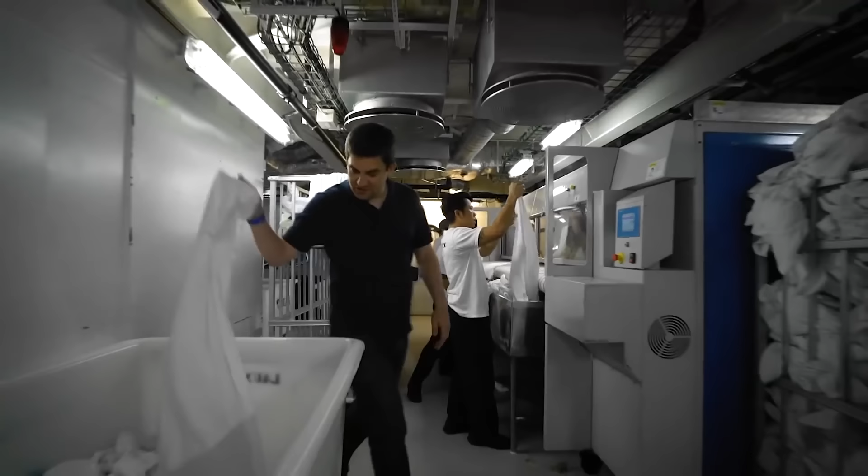Homeowners know that the most difficult thing to iron are sheets and duvet covers. It's really quite time-consuming to do with an iron, but here you have to iron 2,000 sheets every day. And that's why they installed this machine here. It not only irons the sheets, but also, this is the most amazing thing, I'll show you now - it folds them. Look, in an ideal way. Not just anyone can do that.

In short, I want one of these for my house. Only thing is, I'm afraid it won't fit into my laundry room.

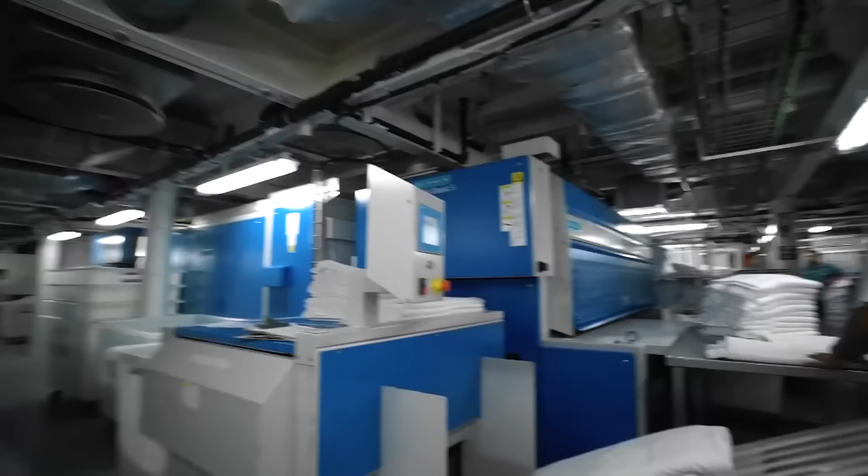The laundry employs several hundred people. There's more than 1,000 in the kitchen, dozens more are in the engine room and on the bridge. A huge army of the crew invisibly makes every second of the stay of the passengers on this ship unforgettable, comfortable, and safe. And yet the passengers themselves will never see most of them.

Only service personnel who are in direct contact with tourists are allowed to climb up onto the passenger decks. That includes waiters, maids, bartenders, salespeople, hairdressers, and other staff. Others, sometimes for several weeks at a time, don't leave the depths of this monster and go out into the sunlight at all. But keep in mind, first of all, they are well paid for it, and second, at the end of the day, they work on the largest cruise ship in the world.

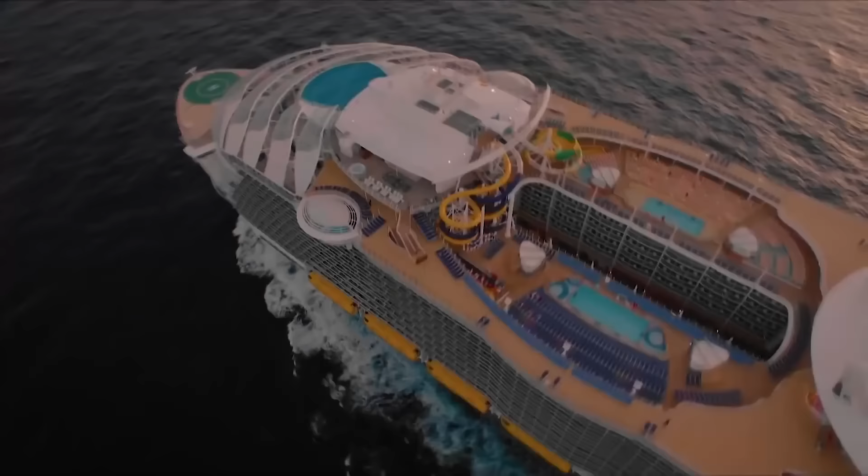And although they can't take in the incredibly beautiful sunsets of the Caribbean Sea from their own balcony, behind the walls of their cabins, which are located on the lower decks, you can hear the rush of water. Yes, I promised that it would be a story without romance, but still.